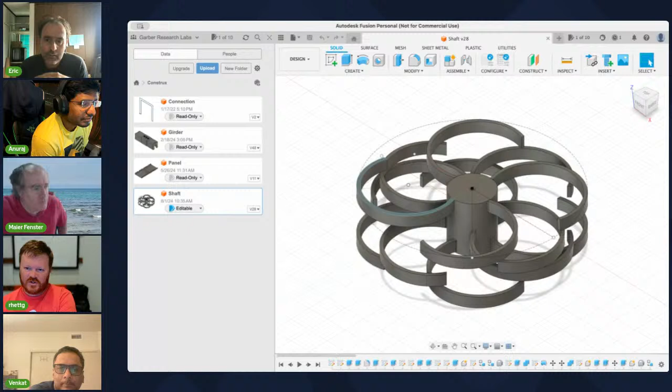I think that is also the key of the rocker-bogie suspension, in that it's a springless and flexless way to get the weight distributed as needed. Whereas if you've got 4 wheels and they're fixed to the frame, you need like a car - you need some sort of suspension, some sort of wheel travel that's got to be independent of the rest of the frame.

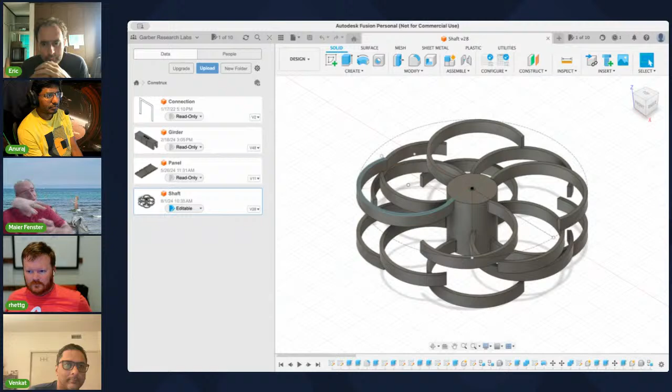So basically, you took one of these rotating leg things and you stacked a few of them, so now you have a nearly circular circumference. Yeah, exactly. So I actually constructed this by drawing a circle around it - that was going to be my frame, and then started building these spines and then duplicated it in 3 rows to kind of give it that shape. I didn't actually think this was going to work.

And in fact, the very first one I printed was thinner. I went back and adjusted it, but the very first one I printed looked like this, and they're so thin, they're like hairs practically, and I was like, well, there's no way that's going to work.

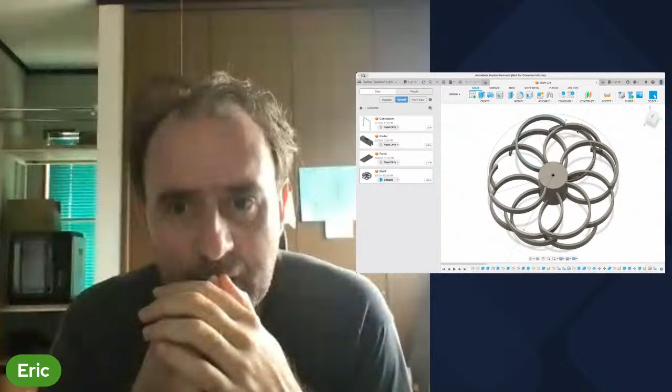But then I thought, well, I got one more try. I can probably make these a little bit bigger and give it another go. Also, I didn't think it would come off, that I'd be able to print it, because think of the overhang situation on this. It's not really optimized for 3D printing. That's a whole other game.

So I didn't think it was going to work, but I just printed it with supports, and it prints it sort of as this solid wheel, but it's filled in with all these temporary structures. It actually popped out kind of fine, and the whole thing printed in 50 minutes, I think. But it was a mess when it came out, and you got to clean off all the pieces, but it came off easier than I thought it would.

I have two questions for you. One, can you turn these legs into loops? And the other one, why do you think they have to lie on the plane?

My theory was that if they're not flexing, it should still operate like a regular wheel in that it's round. No, but you can make each leg into a complete loop. That's my question. It wouldn't flex then.

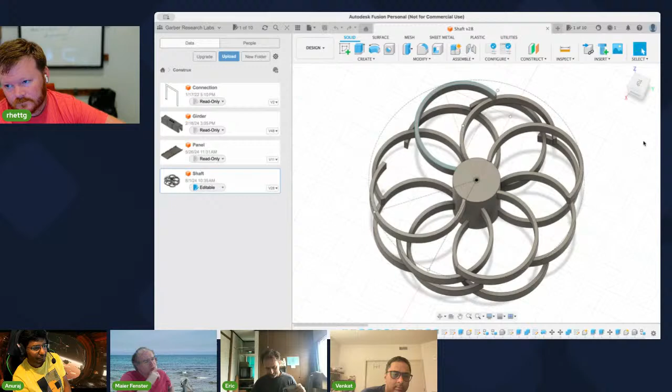The whole point is that the circle is interrupted. That's what allows it to flex easily. Depends on the material — if you make it thinner, it would be flexible, even if you had closed the loop.

I'm worried about stuff getting caught, you know. Yeah, I think that's a very fair point. And I ended up, I think, cutting the end of this loop.

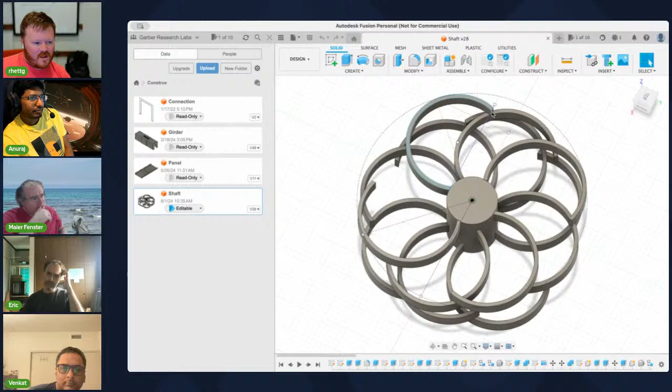Actually, the very first — let me show you the sketch. So when I was constructing the curve, I ended up cutting this shorter than I originally did because it started to interfere with the neighboring piece, I think.

So it was unclear, but I wanted it to be up far enough to try to avoid as much as possible it catching on something, because I've got it going in both directions, and you may want to go forward or backwards. So there's always a possibility of catching.

I could imagine wanting slightly more clearance, but I didn't think it was going to work at all anyway. So I was sort of like, if this was my problem, it catching on things — no, it's fine.

And the second question had to do with being in a plane. You have all of the legs in the same plane. You have four levels. Why not — I mean, not why not — what do you think about having them at an angle?

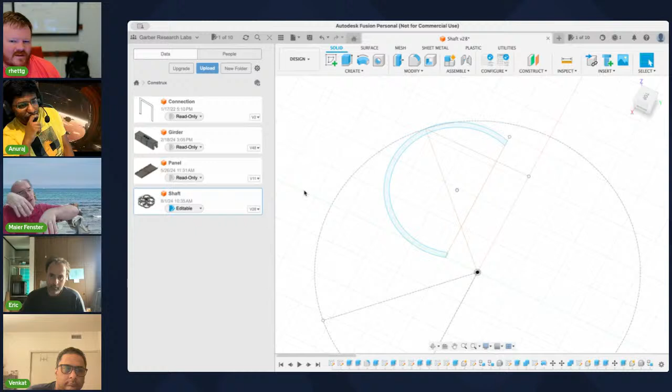You mean like not... like 10 degrees? So they're kind of splayed out? Maybe more like — it would look more like a blade. In other words, when you look at it head on, they would look like they're at an angle, but they still fit inside this cylindrical shape of the wheel.

Omnidirectional wheels kind of have that skew geometry. The video I posted — I've shown it before — this is from an old professor of mine. It actually has legs similar to your wheel, except where you have like a dozen of these, it's just a single circular hoop per leg.

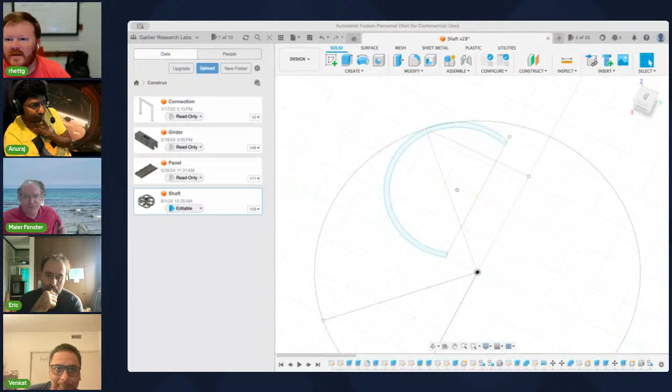Can you play that video quickly? You'll kind of see how it works. Right, but that's actually legs. Here it's a wheel. Yeah, because these legs also jump and do all this other stuff. But the principle is the same.

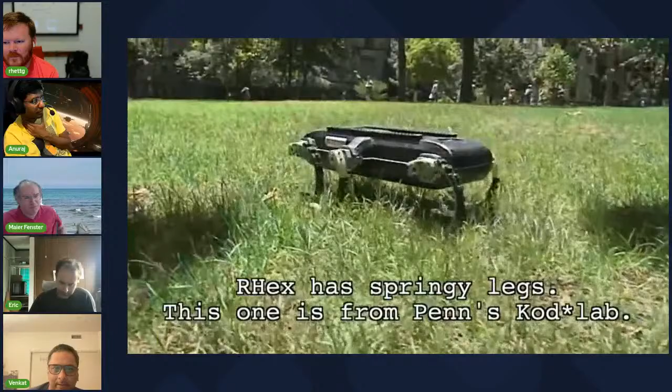This flexes because of the same compliance principle — it's not a complete circle, so the hoop stress is lower. So Rhett's wheel would have a smoother motion than this, and I think you don't need as many spokes as you have, Rhett. I think you could have as few as three and it would give you roughly what you need. But the more you have, the lower the load on each, I guess.

But yeah, this concept basically works — you just have to really dial in exactly what they're going to support.

And I was kind of like, well, maybe some of these are going to break, and maybe an assembly of them might work out better. But yeah, this shape would be a hell of a lot easier to print than what I did.

Look, RHex is always moving the legs in a way that it doesn't get caught in anything. Whichever direction you go, these walking moves lift. I think they're offset, but the middle ones are always moving backwards, picking something up with a leading edge.

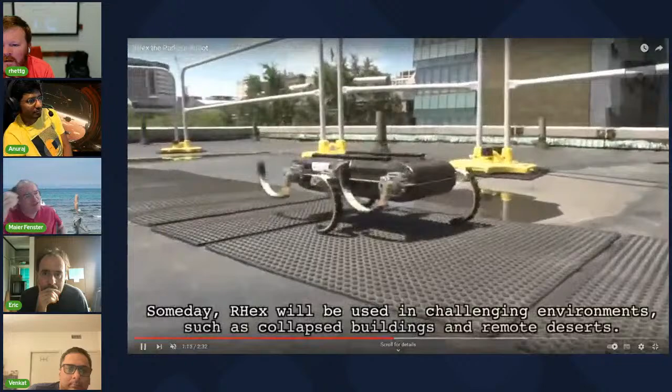But let's look at your wheel. You said you managed to print it, right? Yeah, let's pull this up. It'll focus.

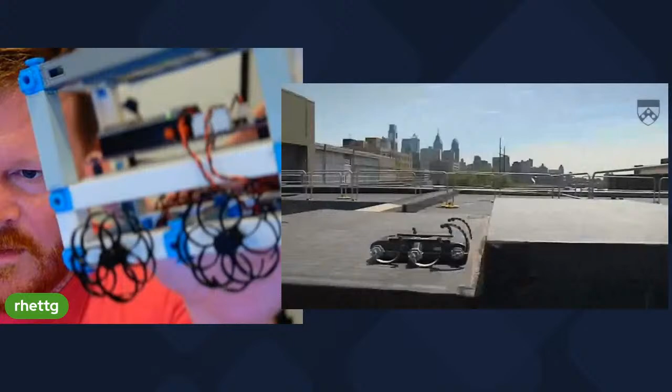Those are really slim, nice. They've got pretty good rigidity. Why can't I get that to focus? Do I have to get out of the way? No, it's clear. There we go.

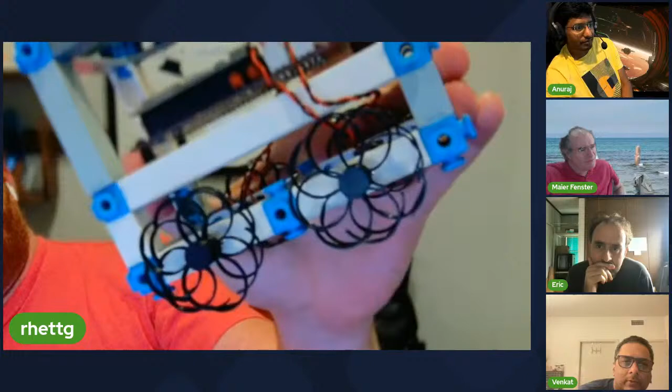You know what this reminds me of? This reminds me of the lunar rover's wheels, because the moon has no atmosphere. It looks like chain mail, basically. Do you remember? It looks like the lunar rover wheels.

Yeah, that's pretty cool. It actually works, and I'm gonna see if I can. I thought maybe I could broadcast or change my camera to my phone. Is that a thing? And those are entirely PLA, right? Those are entirely PLA.

Yes, you can change the camera to your phone if you have it attached. I think I did have it attached once. How do you attach a phone to your Zoom session? Well, I use an app at the operating system level. Right now I'm using my phone as my webcam, an app called iRiun. You have the app on your phone, and then there's a version that works on Mac too - you install iRiun on your Windows or Mac machine, then connect to the same Wi-Fi. I used to have an app for that, but it was on my other laptop. I don't know, it's supposed to be built in. iRiun - I found it. Well, anyway.

I think I can maybe do this still.

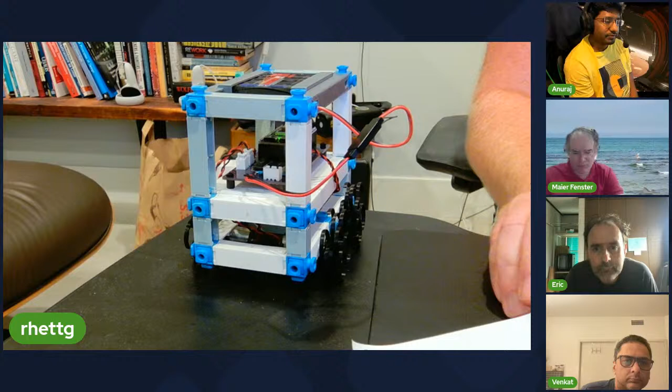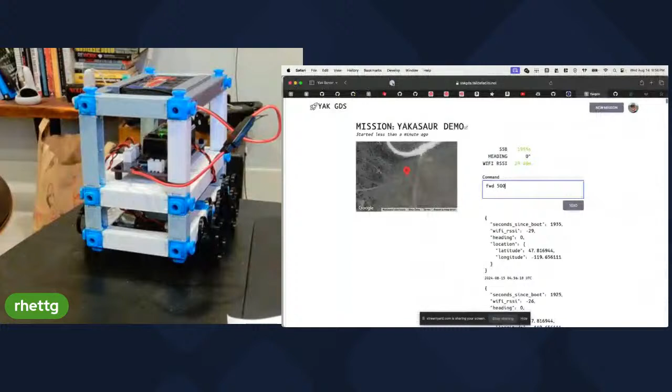So let me also share my screen because you can get the... oh, that's this one. Can you pull up my screen too? Cool, yeah, all right.

So I don't remember if you guys remember this or not, but this is my ground...

I think your audio died, you disappeared. Rhett's audio died. I can sort of hear, but very faintly. I think the mic has switched. How about now? Yes, now it's better. Good, okay.

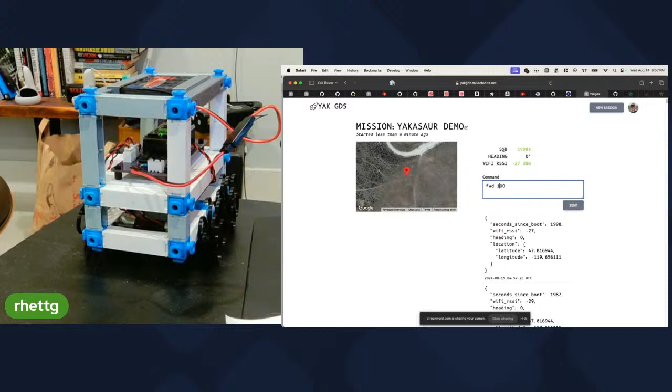Yeah, so anyway, this is my Yak ground data system application that I've used to control this thing. I think it's working - based on the seconds since boot being updated, that's a good sign. And it's showing me what the current Wi-Fi strength is. I think this will not run off the desk if it works.

Cool, wow. Can you show us a side view so we can see only the wheel? Because here it's black on black, it's hard to see. Oh yeah, sure, let me see if I can put... there we go.

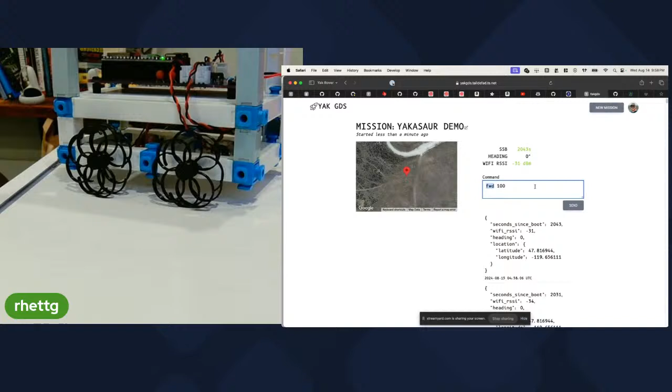Yeah, I'd like to see the bottom of the wheel. No, it's fine, I see it now. There we go. But I wasn't sure if it would be able to turn or not - that was the other real question here. But it kind of does.

What happens if you put a little piece of Lego for it to bump onto? Can we see that, or maybe a pencil? Let's see, find something good here. That might be too big. Legos, I need to have Legos. Only these little tiny pieces.

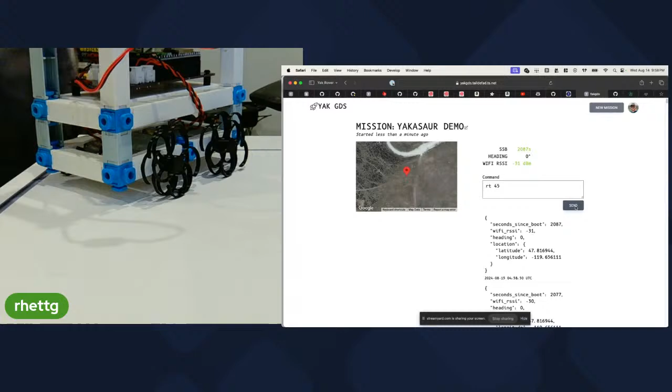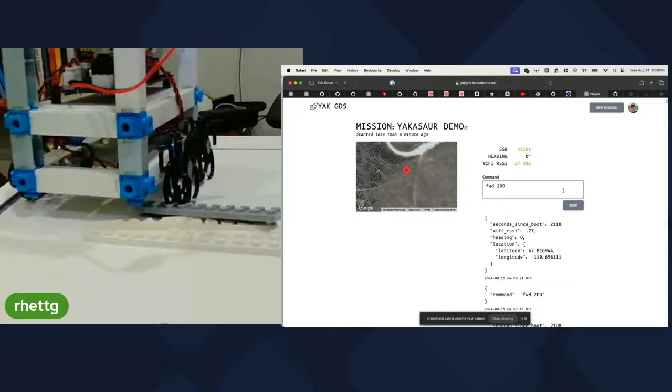I think that's the front. All right, moment of truth. Wow, oh, look at that.

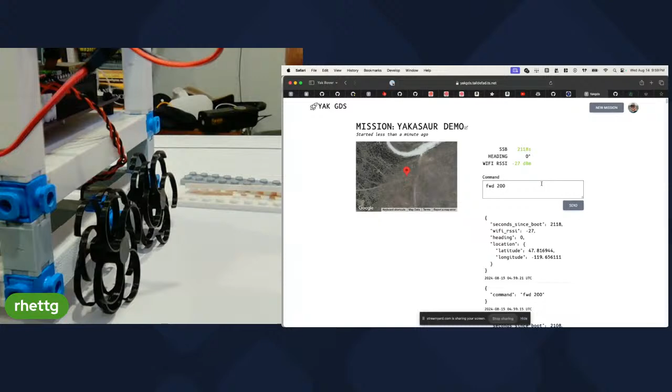Is it too much to ask that you put on the old wheel so we can compare it? Yeah, that's good, that's a good point. So these are still just press fit on, which I don't love, but for whatever reason these printed better.

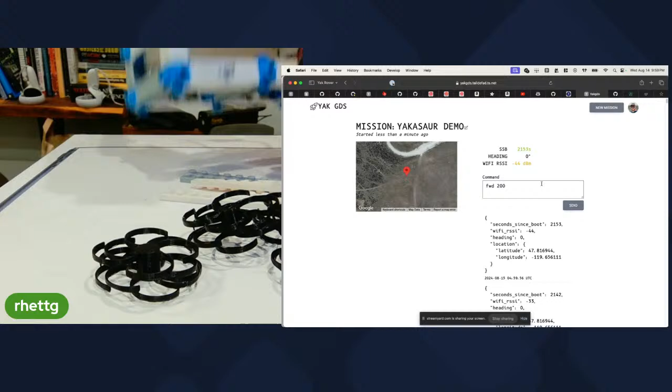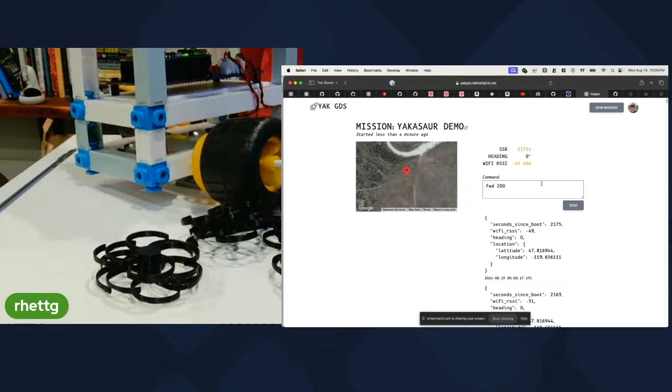So the idea of it getting caught in stuff could be a feature if the job is in fact to catch stuff, like harvest some stuff. You could turn those things into blades and it could be a harvester machine. Why not make every other wheel a blade and then use it to run over cockroaches.

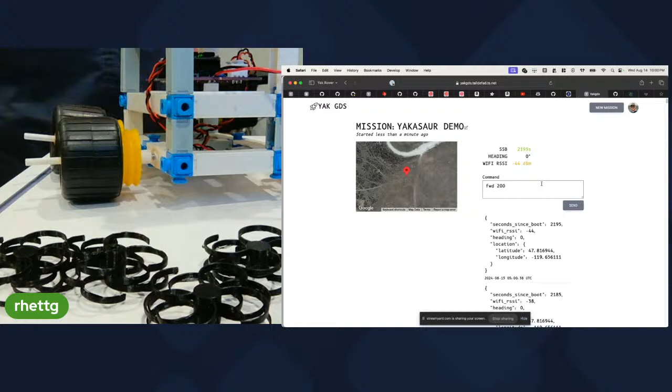And where is the fourth wheel? Did my kid steal it? Is it the same size as these? So you can mix and match. Yeah, that's true, it should be here though. What did I do? All right, I'll just put one back on.

It's the same diameter, the wheel? They are pretty close. Okay, oh yeah, I can see the sagging from the... Yeah, it just doesn't quite have the... Good, yeah, and they just come off super easy. Oh see, yeah.

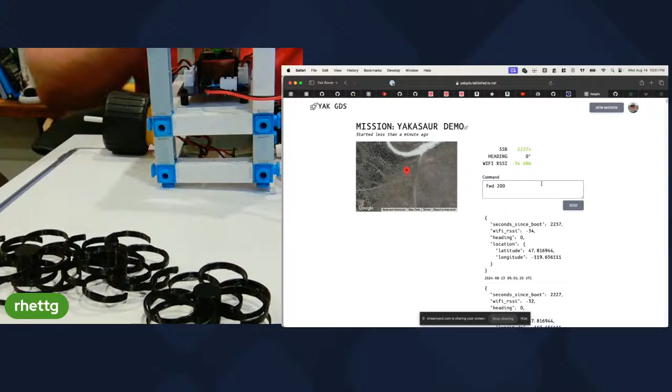Therein lies the problem. And I guess these could have like these shafts. Maybe I could get them to be slightly less, put the tolerances slightly down, but I think there's just so much sideways force when it moves that it makes it kind of hard no matter what.

All right, so now we are comparing. Yeah, and I mean, it works. No, you pretty much have to go over a piece of Lego. I mean, yeah, there we go. Yeah.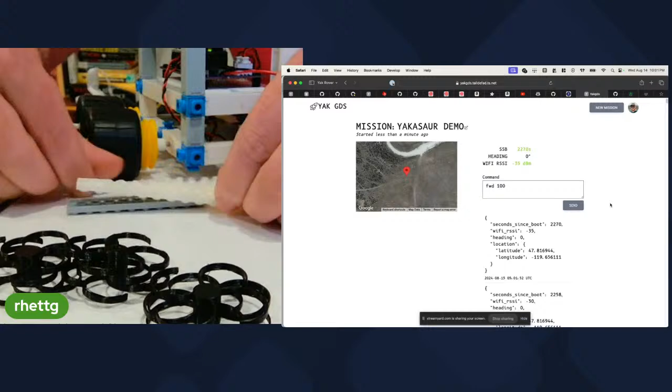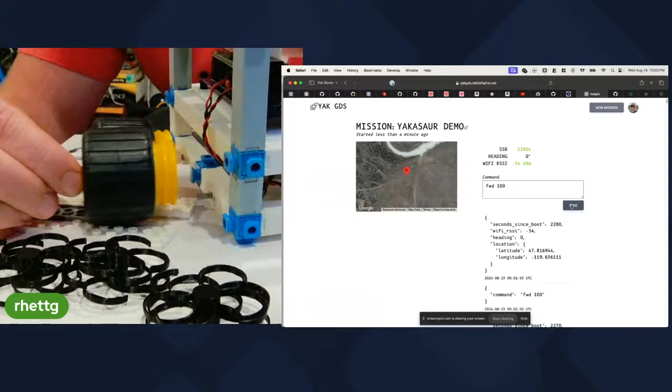I'm rooting for it to fall off. Yeah, I know, but that wouldn't be a fair comparison. That is actually almost like it's just barely kind of hanging on. No, but it's a completely different dynamic when it goes over the Lego pieces.

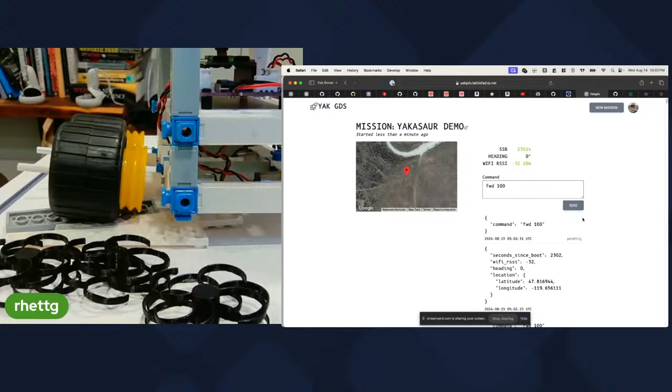So you want to just replace that wheel, the one that's looking at us, with a, I don't know, spline wheel? Maybe we can flip this around and do it backwards.

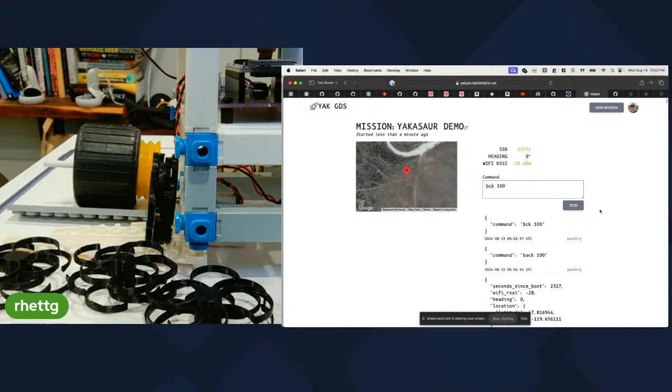Much nicer, I have to say. I think the movement of your spline wheel is much nicer. Yeah, this is cool. I think if you made it a little bigger, it could go over fairly decent sized obstacles. Yeah, I'm kind of inspired to make them bigger.

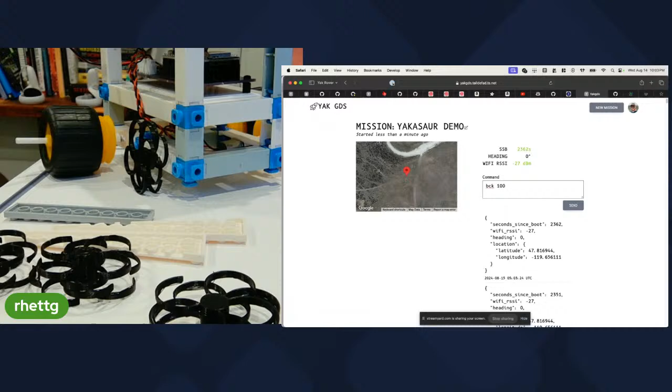The only consideration I was trying to figure out is if I'm limited in how big I can make them until they start hitting each other. Oh yeah, but this is PLA, right?

It's PLA. Okay, oh, that's where the robot I showed in the video gives you an opportunity, right? If you make them not a full circle, the envelope of these little leggy things, if they're staggered, you can kind of get them larger but still closer to each other. You just have to make them more like legs, basically, like two half moons out of phase.

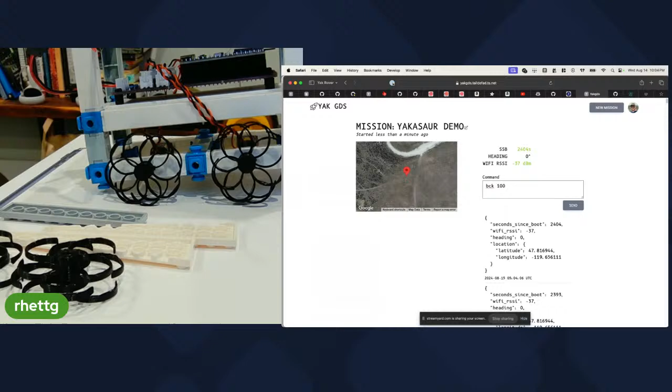Well, if they had an offset geometry where this one was out and this one was in, yeah, then they could slip between each other.

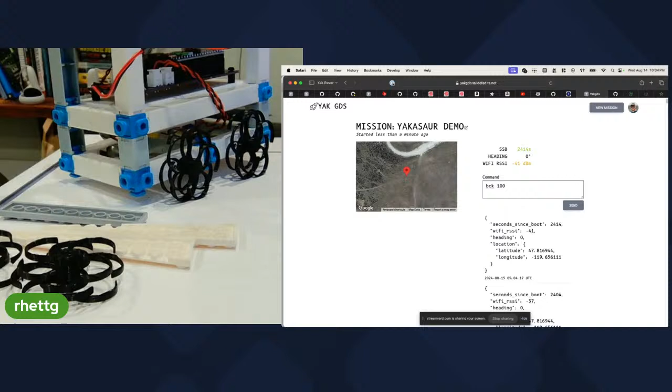Although the overall balance of this thing is going to get maybe a little wacky if the wheels get too big, I don't know. I mean, I could also make it longer, but it loses integrity. It's not worth optimizing on this chassis, but as a proof of concept, it's great.

It's worth thinking of this wheel for the Yakasaur, for example, like putting it on the tumbler. Yeah, I gotta say, I really like this idea.

Yeah, and I also kind of want to do like, I wonder how many tens or hundreds of feet of distance I can travel on these and have them go before they break. Just how brittle is PLA? And does it matter if one or two of them just fall off?

I think you have a different problem. It's a problem of wear. In other words, if you lose a few tens of microns to the wear, the whole handling changes and makes it more likely to break.

But the handling will change. Yeah, interesting.

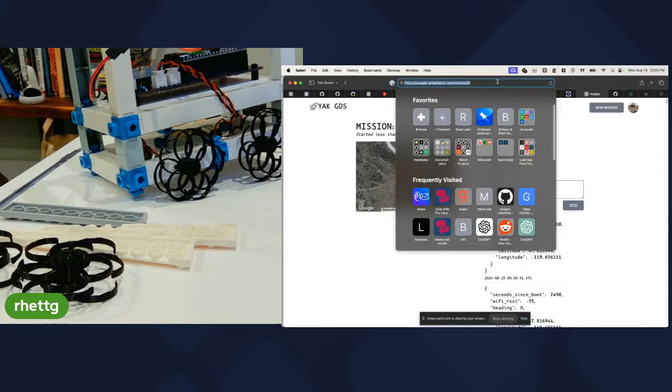Remind me again how the Tailscale server thing works. Let me walk through that. So this is running on our YaRG Robotics Garage GitHub account backed tailnet thing. So you can see this, right? Yeah, I've got two tailnets I have access to on mine. I can connect to my personal one or the YaRG Robotics Garage one, and anyone on the YaRG Robotics Garage can actually hit this page.

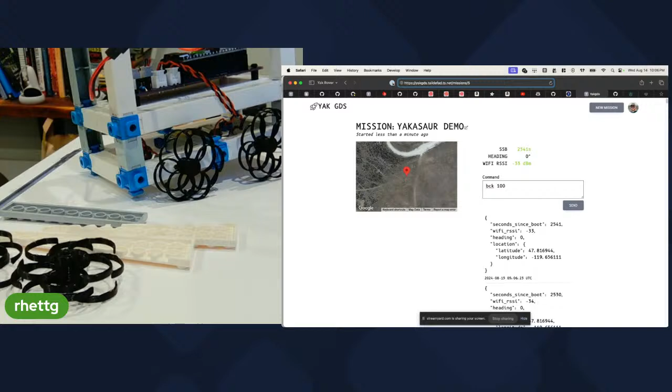But how the rover connects to it is slightly awkward because I could never get HTTPS to work. So what I had to do—you mean on the ESP32, right? Correct. And yes, that's my Wi-Fi password in there. I don't care, anyone who watches YouTube can feel free to connect to my Wi-Fi.

This has the GDS URL. This is my local network IP address. And then what I ended up doing was running a reverse proxy web server, which is kind of terrible, but it basically proxies from my computer, my laptop, over the Tailscale network to where this Yak GDS VM is running.

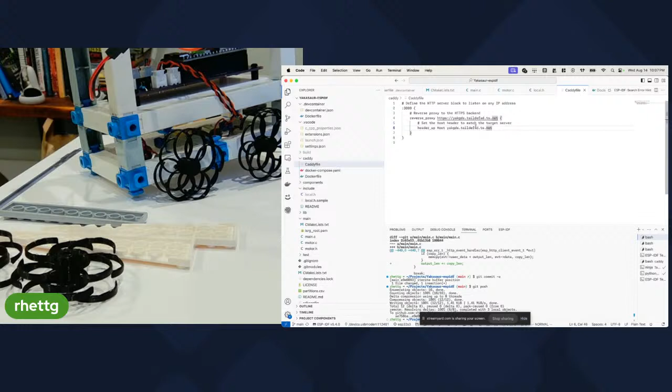So what is a reverse proxy? A reverse proxy means there's a web server running on port 3000 that, if anybody connects to it, will actually rewrite all the HTTP headers and everything and connect to this other web server, making that web server think they're talking directly to the rover when in fact they're talking to my laptop.

So you can see this line right here, it's rewriting a host header because the host header in the HTTP request is what actually got connected here. So it actually thinks it's connected to a web IP address. This throws that in there so the web app thinks it's connected to a specific name.

So what is a Caddy file? Caddy is a web server like Nginx or Apache, but it's modern-ish—kind of the new hotness. It's got some other cool features too.

I'm not using it in this particular example, but you can set up Caddy to automatically generate your certificates for HTTPS stuff. If you're running it over Tailscale, it's Tailscale aware too, so it can use the Tailscale info it knows it's connected to, pulling the correct certificate. So I'm also running Caddy on the machine running this Yak GDS thing, but configured differently.

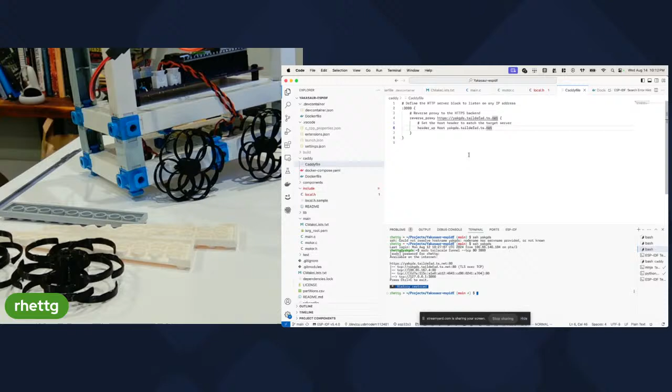Yeah, I would have to have built authentication directly into the app, which I did not. And in fact, what I did instead, which was more fun for me, was I do have authentication. I just added this actually, where it says I'm signed in as rhettg, but that's actually because it knows what IP address I'm coming from, and it looks that up in Tailscale and authenticates that way.

Okay, so I'm still not quite understanding how the proxying works to the outside world. So the rover sees all requests just coming from your laptop, right? Even if they're being relayed from somewhere else. So it cannot actually. Oh, yeah.

So the other big difference between this setup and what Anuraj is doing is that the communication is going the other direction, because I'm putting the IP address of my server into the rover, and it's calling out to try to find a server to talk to and pulling commands down, as opposed to offering a web server that receives commands as they come in.

It feels like it could connect to a server anywhere. Yeah, so it would be nice to actually have that. And since there's not really a reasonable way to try to run Tailscale on the rover itself, that works fine on my Raspberry Pi based rovers. That's what I did for my other ones.

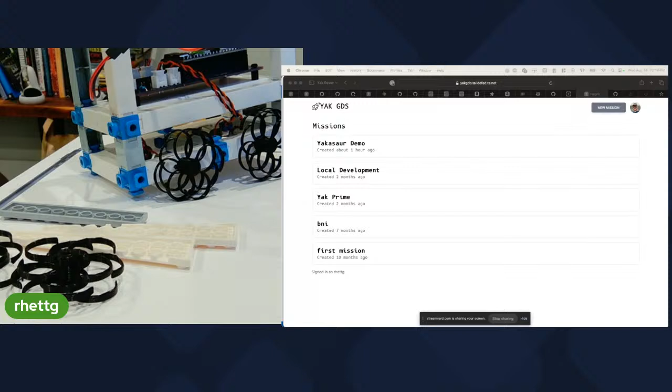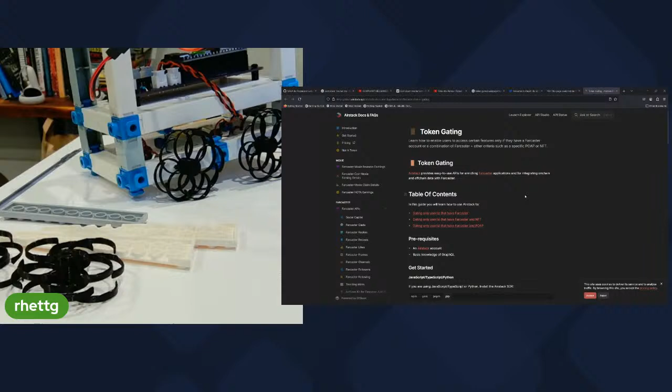So what it could be, I could expose an API endpoint for the server that is actually publicly accessible and has some other authentication scheme, like a token or something that's got to be passed in. And then that can just be public, and if you built your application secure enough, I guess maybe it's safe. But I'm actually trying to think in terms of having the best of both worlds. It sounds like Tailscale is the solution if you want to have a trusted group that can do a lot, and something like Farcaster would be a way to expose a lower trust level of agency, right?

So yeah, the rover should be able to distinguish that this particular command is coming from a trusted computer within the tailnet, and therefore it can do way more, or this command is being somehow relayed from the wild west out there, and therefore I'm going to just not do certain things. So where is that logic implemented? Should it be at the edge between the tailnet and the outer world? Should it be on the rover itself? Should it be on some machine in the middle? Like, where is that trust logically fitting?

The way this Yak GDS application is architected is to sort of mimic how I was thinking that the cell card that I bought as an experiment, and then never actually used, works. They have this cloud service that they offer, so all the communication that you have with your rover over the cell network is actually to their cloud service. And it communicates in a series of notes, and you put notes in a queue on your device, and they eventually get uploaded to the cloud, and you download notes from the cloud, and then you can access them on your rover.

And so this kind of works the same way in that it's like a clearinghouse for communication between users and the rover. I would say that information could be figured out inside of this application. You could somehow expose it and just have some authentication system with tokens that determine access, or maybe there's some special URL that you design and give to Farcaster or whatever, that's the one URL it's allowed to access, and everything else has to be authenticated.

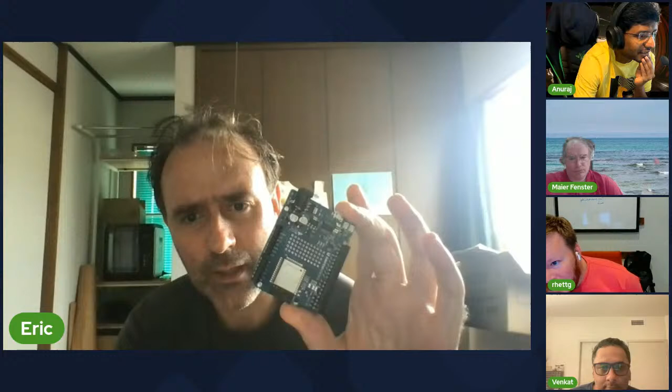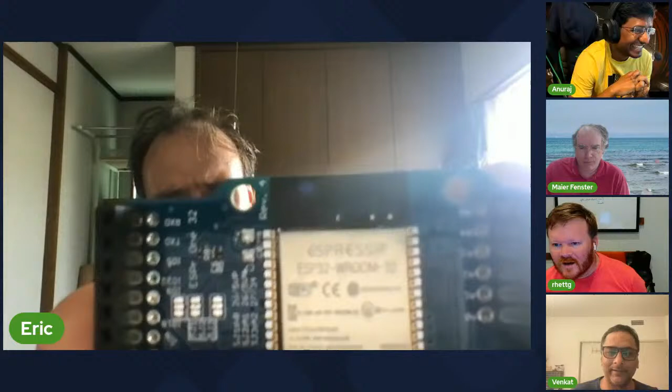The other one is the WROOM. Yeah, it's an older model. Huh? Yeah, it's the same. So...

ESP32 here, you're saying it's table stakes because of the higher processor and memory, right? Higher processor, memory, and Wi-Fi. But this one does a breakout board for the Wi-Fi, right? The Uno based, does it have Wi-Fi on there, or is it Bluetooth? I think it does have an ESP32 cam. Yeah, I think it is connected to Wi-Fi, but I don't know. I haven't yet gotten to that stage in my build. But it's not the main processor, I guess, it's just used for the cam.

Oh, actually, I found this Kickstarter that started yesterday, and I had been thinking of designing the hat in the form of an RPi hat. So if we use this board as the ESP32 board, we can stack hats on top of it, and we can also connect the RPi to this. So it already comes in RPi form factor, and you can stack on top of this. I was planning to design an RPi motor control board, or a motor control board, in the form of an RPi hat, and stack that on top of this. That's what I was thinking. But this started yesterday, so delivery is in November.

Wait, so you would design a hat and stack it on top of this, on top of an RPi? What does this do? We have to connect each of them together anyway. Wait, I don't understand what this is doing. So this is just multiple ESP32s in RPi form factor. Oh, this is ESP32 in RPi form. Okay.